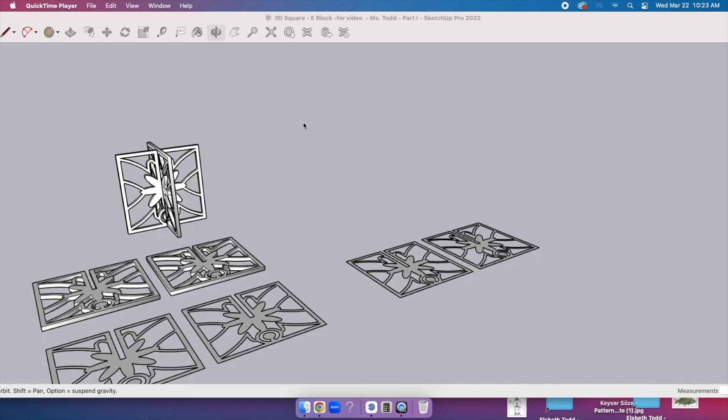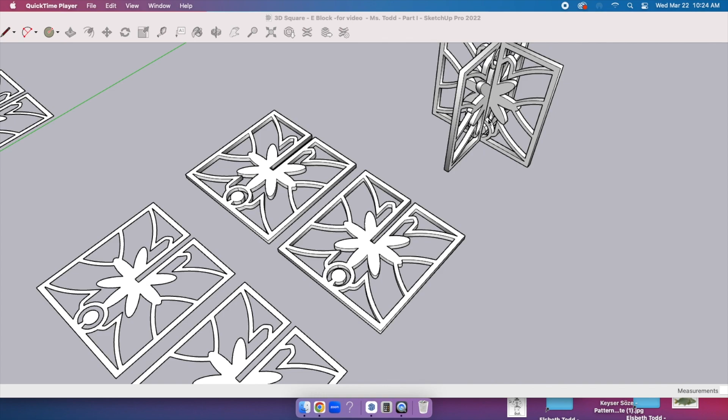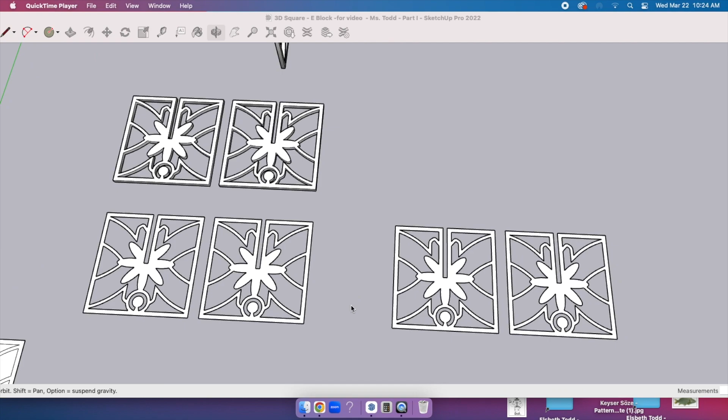Sometimes when you put your design together, you might realize that if you put it together with the slots going in the same direction, if you've got something different on one side, or let's say you have a design you want to keep in the center, you may have to move that slot. In this example, I've got slots in the same direction - these are two squares of the same thing. But when I put them together, because you have to turn them upside down to slot them together, you'll notice that circle at the bottom is at the top on the second one. So when you put them together, the design isn't symmetrical. So what I'd like to do in this video is show you how to change the slot position so your design will be symmetrical when you put it together.

So over here, I've pulled a copy of my original design, and I'm going to modify one of them to have the slot going the other direction. To do this, I'm going to pull a guideline first from the edge. I'll click the edge here and lock it right onto the side of the upper slot, and then do the same for the other side. Now I have a clear pathway of where I need to draw my lines.

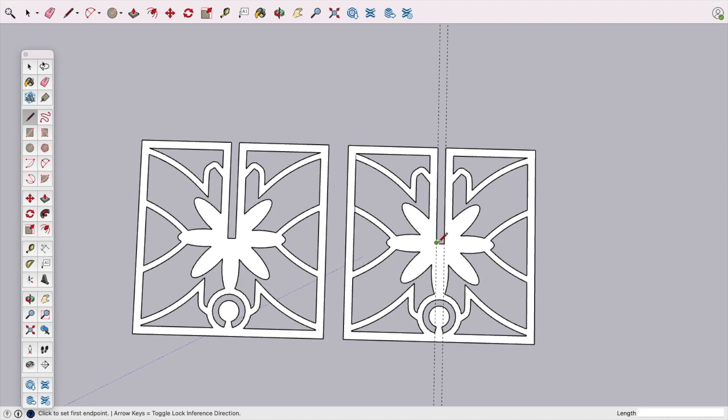Now, when you do this, especially when dealing with circles, you can see that the line, if I zoom in, wants to go to where the corner of that segment meets, which is not where I want it to go. So make sure you bring it in so it's snapping to the green or red axis. This is important because you want to make sure those edges are really parallel.

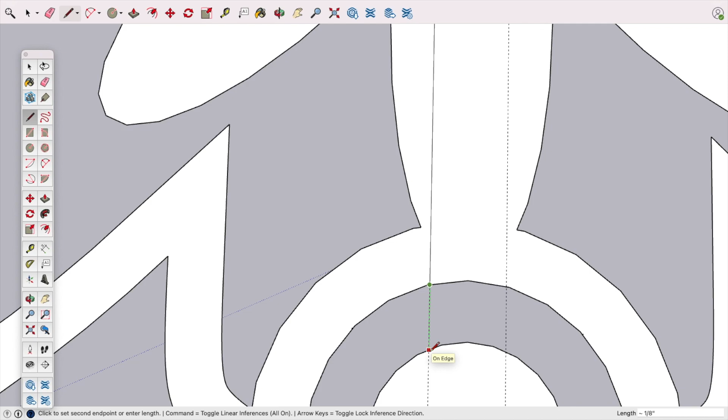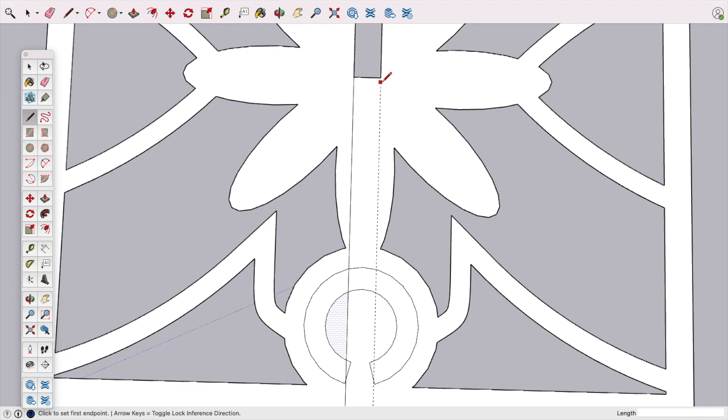And then I'm going to click again, and it's going to try to do the same thing, so I'm going to keep it going, and notice I'm not drawing over the edges. With this one, it's probably okay, but I have to check to see that everything cut properly. Then I'm going to do the same thing from the other side. Again, you really have to pay attention, and if you're not zoomed in, you can't see it. So make sure you can really see where you're pulling your lines from and where they're going to.

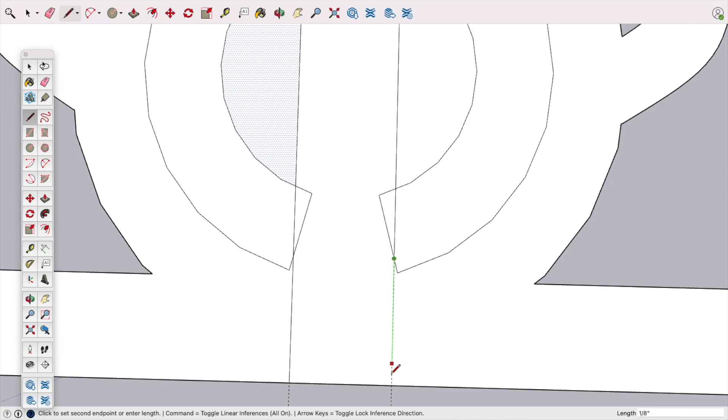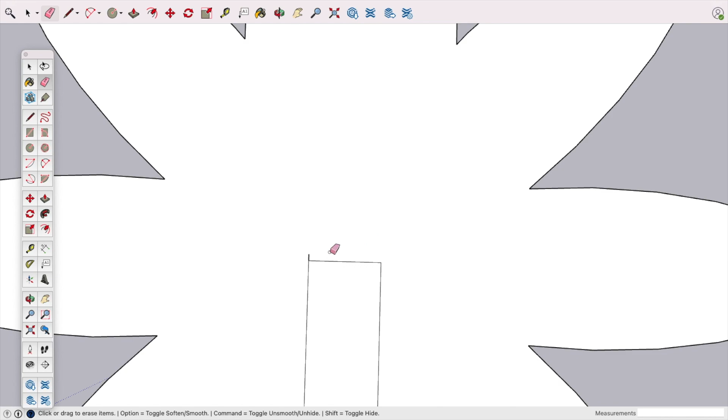Now I'm going to come straight down, then zoom out and pull across the top and fill that in - you notice that will fill in as soon as I did that. So now I'm going to delete the upper lines. Watch stuff like this - depending on how you made your design, you might have some little geometry there. Then I'm going to come in here and delete these things. Sometimes if you mouse over two lines with this and place your circle right between the two, it'll delete both.

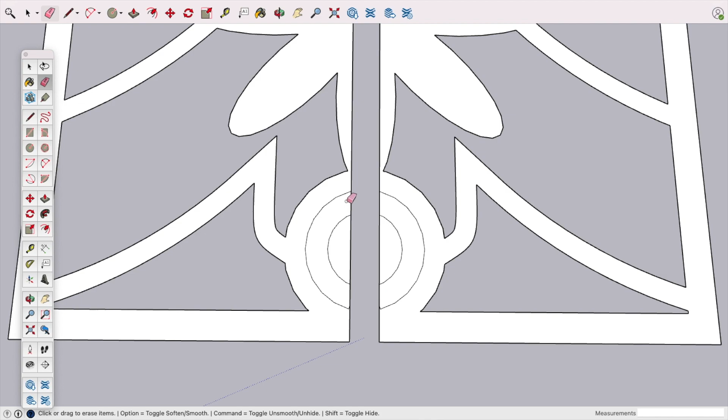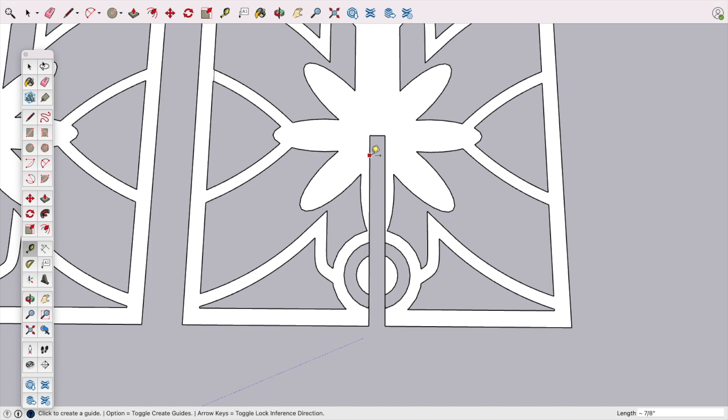And now I'm going to delete this line, so this gives me my slot. However, you'll notice that if I delete this line, since this is part of the design, this would be hollow - this is just a line, and I really need some thickness there. So I have to take my guideline tool again, and this time pull 1/8 of an inch out the other direction to put back that frame. And then that shows me that I need to...

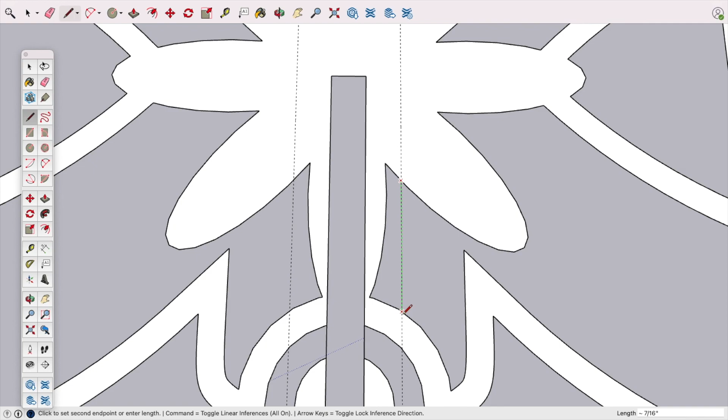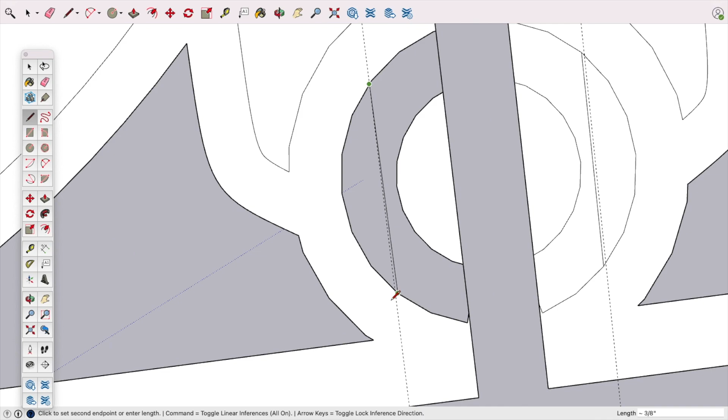draw from the corner here to there. It's okay if it fills in - just make sure these are straight. This doesn't have to be quite as exact as the interior part of the slot, so you do have some leeway here if you want to make it not quite as thick as the outside, but 1/8 of an inch is a good rule of thumb.

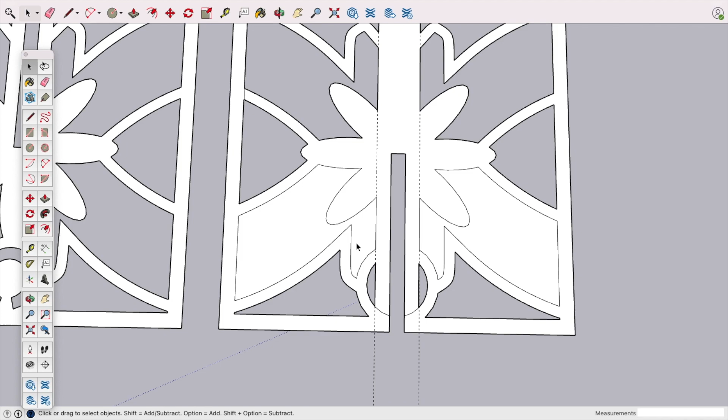Okay, so now, sorry, I'm going to orbit us the right way here. Now I have my slot, and I can go in and delete these lines. You'll see that these filled in, so I'm just going to delete those. And then I'm going to delete my guidelines.

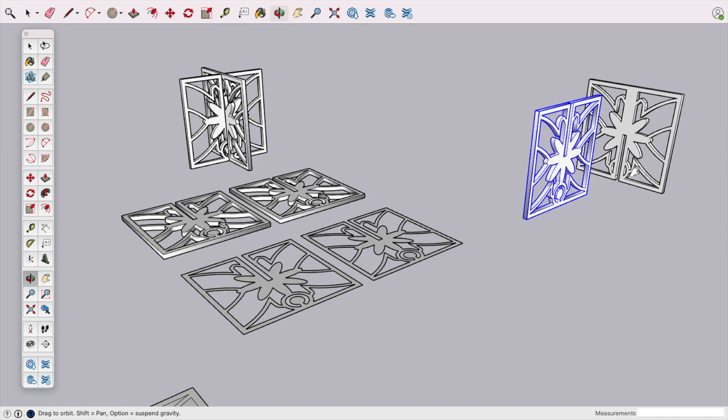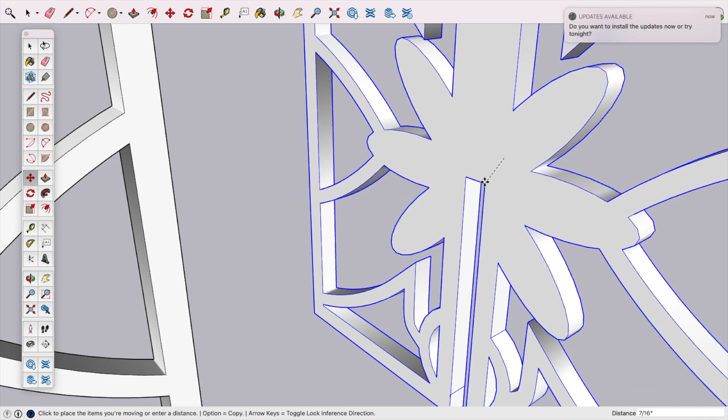Next, I'm going to pull these up and put them together to show you how that's going to look. So now you can see the slot on one is in the up position and the slot on the other is at the bottom. Now I'm going to put these together. I'll select the object and click the move tool, zoom into the right corner of this edge, to pull it across to the left-hand corner of the other panel - remember, zoom in so you can see what you're clicking on. Now I'm going to bring it across. You don't have to do this in one move, you can do it in multiple moves, but you're going to bring it across and then let it go. And now you can see that circle is at the bottom and the overall square is more symmetrical.

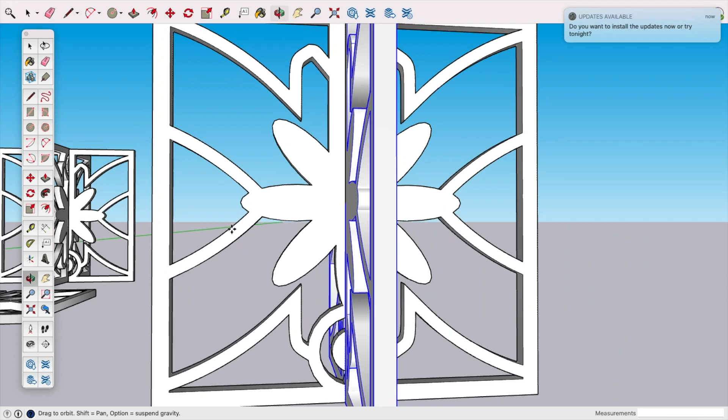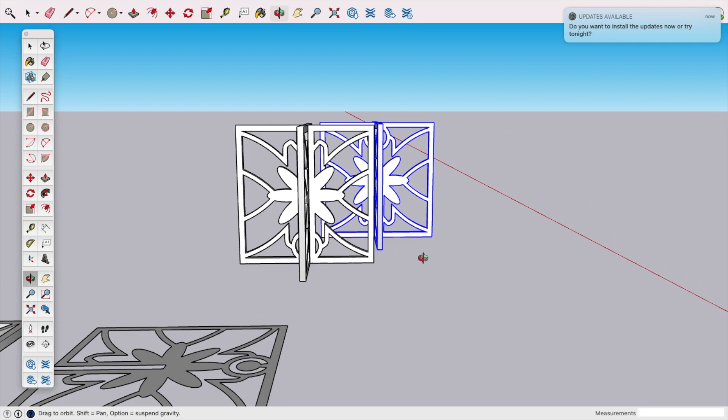Here's the one where the slot wasn't moved, and here's the example where the slot was moved. So together, if I bring them side by side, here's the difference: the circle is at the bottom on one and at the top on the other. Here on the left-hand side where I modified the slot, the circle is always at the bottom and the design at the top is the same. So that's the difference between moving the slot and not moving the slot. This one on the left, the slot was moved to the opposite direction, and the one on the right, it was not. So it's up to you what you want to do for your own design.